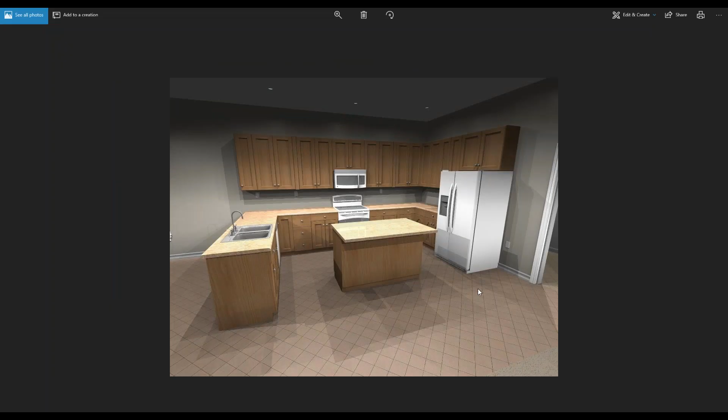I'm just going to pop this up real quick. This is what we started with. You should be able to see this image — very basic, 80s or 90s style kitchen. Nothing too fancy, oak cabinets and plastic laminate tops. And the flooring might be a little bit horrendous.

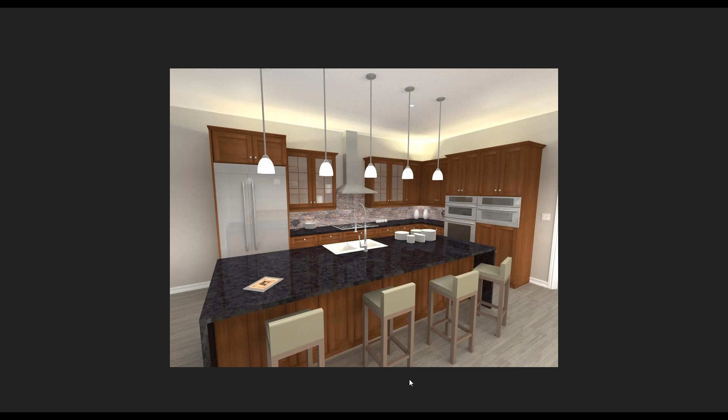So at some point, you want to just update your image. You want to get a little bit cleaner look, something a little more modern. I'm just going to pull up one that we're going to attempt to achieve here. There's a good one there. So this is just an image that I ran last weekend, something a little more contemporary.

We're going to start with the bare shell. We're going to start by adding in our lower cabinets in this area over here. We're going to add some tall cabinets. I'm going to show you how to modify the face layouts to accommodate some built-ins. We're probably not going to put this in, because this unit actually has a microwave. When I did this, I didn't realize that — I thought it was a two-oven setup, but it actually has a microwave. So we're going to leave that second one out, just do that as a pantry. We're also going to do a built-in refrigerator over here with a rather tall cabinet above it.

Take a look at how you can do backsplashes, whether it's a wall finish that we put in, or whether it's a solid, or we can do it as a tiled backsplash across the back here. All right, we have a hood, we have some pendant lights dropped in, and we have a waterfall countertop on our island here, which is a nice large island, great for entertaining.

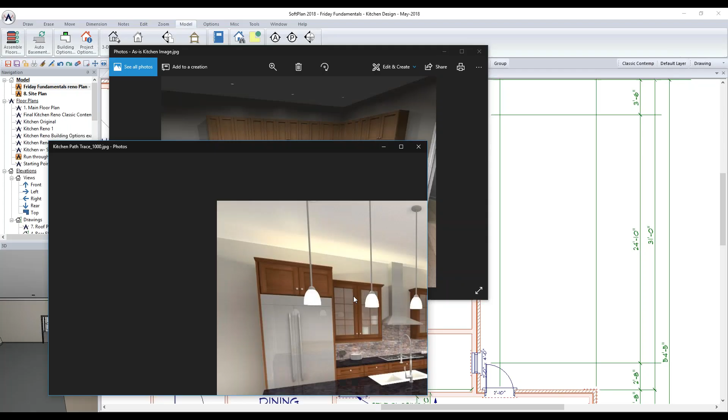Okay, so as you can see, a big improvement over what we had here. We're going to try and achieve this look when we're all done.

Okay, the image quality may not be quite there with what we have time to generate in class today. What we have here is what we call a path trace. It's a ray traced image using the path trace lighting, which means it took about 1,000 passes on this particular image, so it ran Friday into Saturday of last week. I'm not sure when it finished up. It's not a very large image, so it probably didn't take that long, but you can see the quality you get out of that with the reflections and so on.

I might touch on that a little bit later as we get into some of the different modes. But that just gives you an idea of how soft the lights can look, and how clean the image can look with reflections and textures appearing correctly.

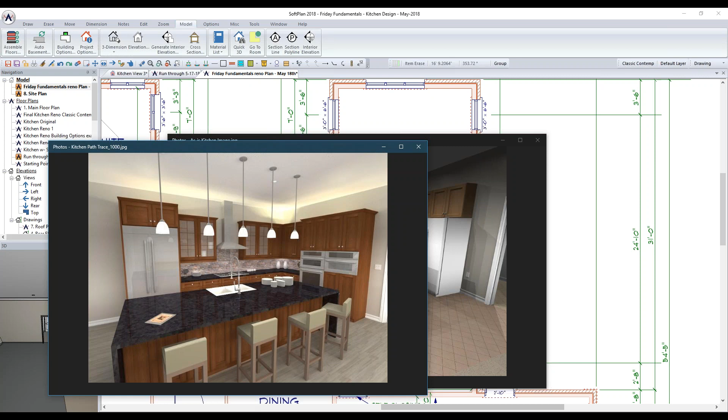We're also going to take a look at some of the different options you can do just from that layout. Very similar layout again, and we can change the finish on those cabinets, make them gray. We can change the countertops to white, and you can see the transformation you achieve just by making changes like that, plus a little difference in the furniture and so on.

And you can also do your white cabinets there. Again, this is a fairly low quality image that I just generated very recently, just to give you an idea. Same cabinets, we didn't have to redraw them, but we can easily go in and modify the finishes so you can give the client choices.

And that's what it's all about nowadays, is they want choices. They want to know that you've explored all the different options for them and not just given them one scenario to pick from. So we have all these abilities built into the program.

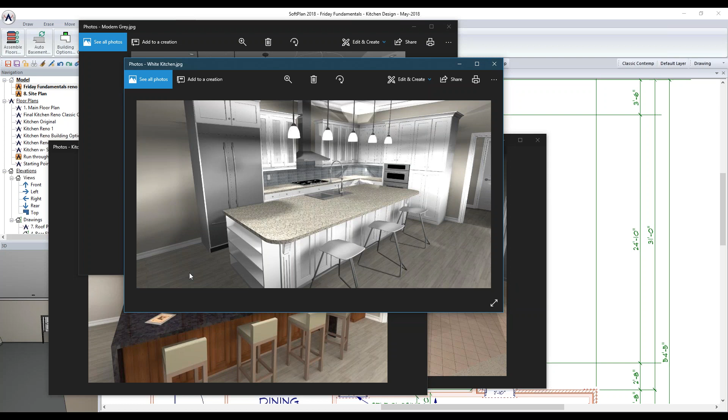You can obviously use the building options as well to set up different appearances. So I could literally draw this layout we're going to draw now, put it on a specific building option, turn that building option off, and then redraw the kitchen again on a new building option.

So when the client comes in, I can say you can have this one or this one. I could do three or four different layouts and just flip them on and off as you choose. So that's the power of building options.

Building options are found under Model and Building Options. I have a few of them assigned here already. The default is where you typically draw, and if you look, you can see you have a number of items up there already at 970. By default, we've put furniture on its own building option, so it can be toggled on and off.

It can also be done with layers for something like furniture that's not counted in your material takeoff. It's more for a 3D aesthetics look. You can put demo items on the building option, so if you had to remove walls, that kind of thing, you don't have to erase them, but you can put them on another layer or building option and turn them off.

We're going to be working in the classic contemporary building option that I set up here. When you go into Model Building Options, you can easily come in and change these just by rewriting over top of them. That's already been done for us here, so I'm going to use this one.

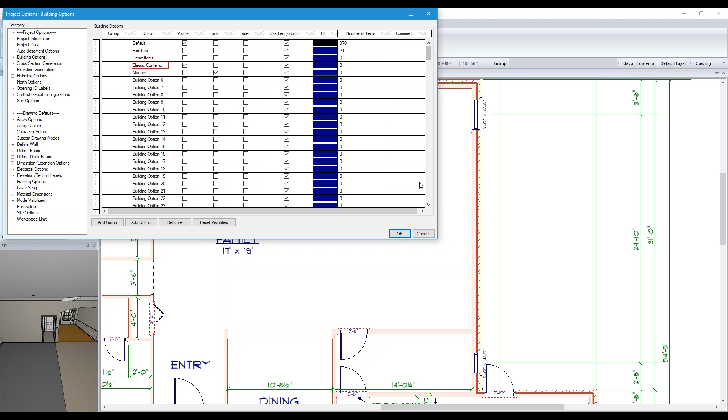Now, if you're accessing the current building option - sorry, I just need to move my GoToMeeting dialog, so if you wonder what I'm doing, that's all I was doing. You can see your current building option listed here.

You can also access them and make them current. You can turn them on for visibility. You can lock them as well. So if there's something you want to do, you set up a building option and you don't want it to be able to be modified in any way, you can set it to lock, meaning it cannot be modified.

You can even fade it to the background so it doesn't show up as full on the screen as an unfaded building option. Something we typically do with our furniture is we fade it on a layer so that when you're looking at the drawing, you see the drawing, but you can also see the furniture kind of popping in there.

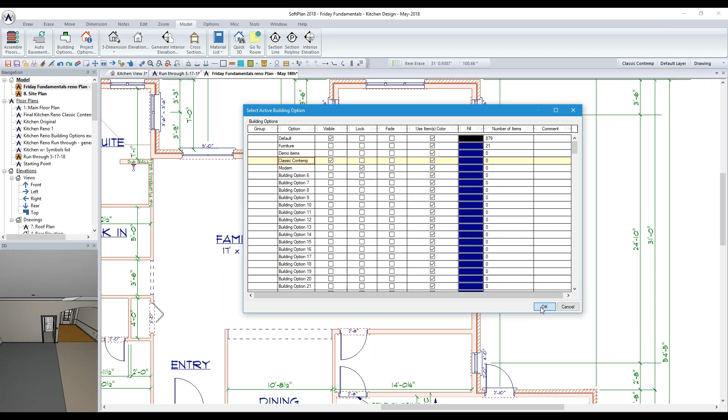To get started, we're going to have Classic Contemporary selected, and I'm just going to pick OK on that. We're going to start by drawing some cabinets in. Given that we have a corner scenario here, we're going to start drawing in the corner. If you're just doing a galley kitchen, you're going from one end to the other - it's not going to wrap in the corner. You can just start with your basic standard cabinets.

So when we go to the Draw menu at the top, on the ribbon bar, you see Cabinet. And cabinet pulls down, you have manufacturer options there. We've put in a number of manufacturers for you to choose from. We are constantly looking for new ones and adding new options to this list.

Right now, as it is, we have Aristocraft, Armstrong, Decora, Dura Supreme which is a fairly new one, Echelon, Kitchen Craft, Made, Medallion, Merillat which is one of the first ones put in there, Mid-Continent, Schrock, and Wellborn.

So we will add more as more become available to us. They are fairly large libraries, the majority of these. A lot of them won't be of any use to you unless you actually know the codes for them, in which case you probably have a catalog or access to that information. You can tell a lot by the names generally, by width and depth and shape when looking at the previews, but it would benefit you to know what you're looking for.

So when we're drawing in here, just to give you an idea, if there was an oven or pantry type cabinet that I wanted, Armstrong is one of the ones that has their libraries named quite clearly, and it's not hard to figure out their codes. So if you wanted to put in an oven cabinet, you can slide down in here. You can see the 3D, and you can even spin around in it. So you can see you have drawers, an open area with rails, top and bottom, that could likely be sized

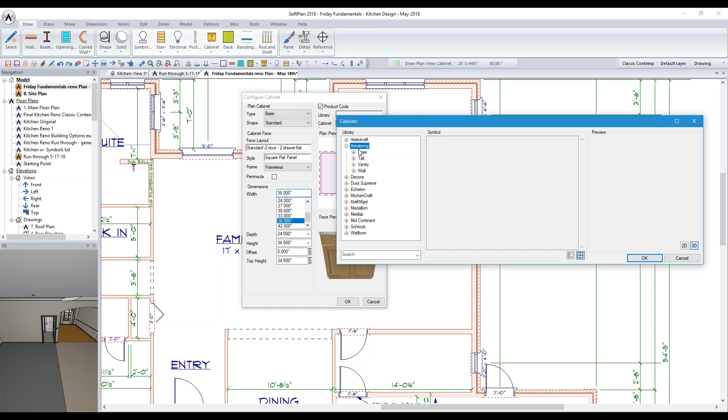You can still dig down and search on specific items, but this gives you that tool. There's a product code box up at the top. Remember when we went to draw a cabinet, you could see the manufacturers there - that's one way to access them. You can also access them from here by checking the product code, then going into Armstrong, then into Tall, and picking the one you want from there. So the option is there as well.

Once you've gone in to draw a cabinet, you're not locked down - you can still get to everything. We're going to go to plan cabinet and pick a base type. Generally, I start on the floor, and then I work up.

We're going to pick a shape from here. We can start with standards. You have diagonal corners and corners. When you get into the corners, you'll have the option to make it an unequal leg, like a blind corner cabinet. You have half round ends, 45 and 30-degree angles, fillers, end corners at 45 and 30, back panels, end panels, quarter rounds, angled front, angled end, and a chamfered corner. So these are different cabinet shapes, and if you click on them, you'll see what they look like in plan.

Don't get distressed over the face preview. It likely is picking up two drawers in this case, because that's the standard being used on the side, so it got applied to that edge as well. Not that you're stuck with that - it's just what the preview is popping up for us.

So you can come in here, and we're going to start with a corner cabinet. We're going to pick next our face layout. I don't want a two drawer flat - I want to pick a single door because it's just a corner cabinet, and there's two small doors there, and I don't want a drawer because that just wouldn't work.

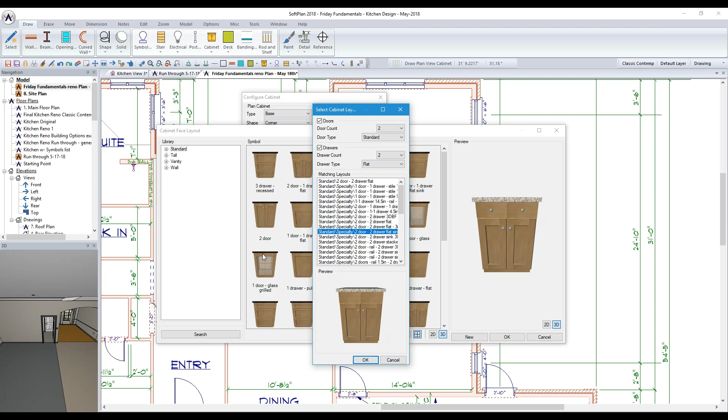The problem was each of these are just names that you'd have to sort through - you'd see them, but you had to click on each to see the differences. What we've done is put that all on a dialog so you can see what you have there, and you can still go into the search mechanism and dig down deeper to find what you need. So that search box in here is still there - it's just one layer deeper now. Hopefully you find what you want right here.

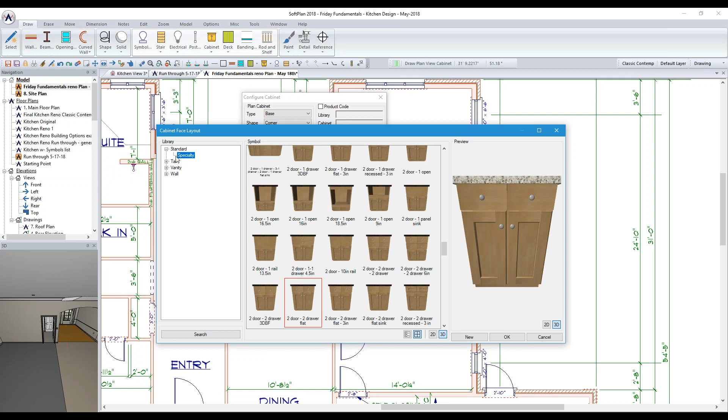And if you don't, you can populate these libraries as you like. Right now I'm sitting in standard. We've put in specialty some of the more detailed, more complex designs that we find mostly with manufacturers - not something you would likely build yourself, but something you'd dig down and find in a manufacturer's catalog. That's what specialty is, and it can be found under any of the different shapes - you have standard, tall, vanity, and wall, and they all have specialty built in underneath them. That's a fairly long list, especially under base, as you can see. But that's not to say you can't come in here and find them.

So if I want a 3-door, I can pick those up. If I want a 3-door left or right, I can pick up the ones I want from there. All right, so we are going to go back to standard, and given that this was a corner cabinet - getting way off topic here - I just want a single door, a 1-door cabinet, as we would call it.

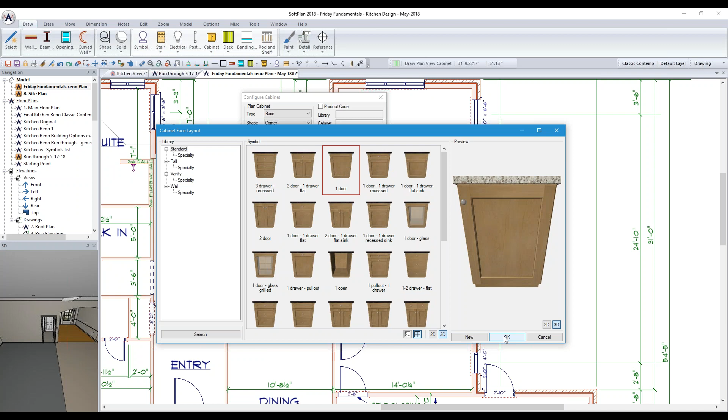Okay, so this is the cabinet face, and I'm going to pick OK. That means that's going to be applied to both of these. We will put a handle on one of the two doors because it's likely a hinged door that opens up as one.

Okay, so the width is 36 inches, 36 inches this way, 24 inches deep. The height is 34.5, meaning we're going to add a 1.5 inch countertop on top to take us up to an even 36 inches. Offset is 0 because it's sitting on the floor. Your cabinets will be relative to the floor system, so you don't need to worry about how thick the floor system is.

This is where you can play with the unequal legs if you want to make it a blind corner, so you go with 24 and 36, that sort of thing. I'm going to leave that unchecked and just go with it the way it is.

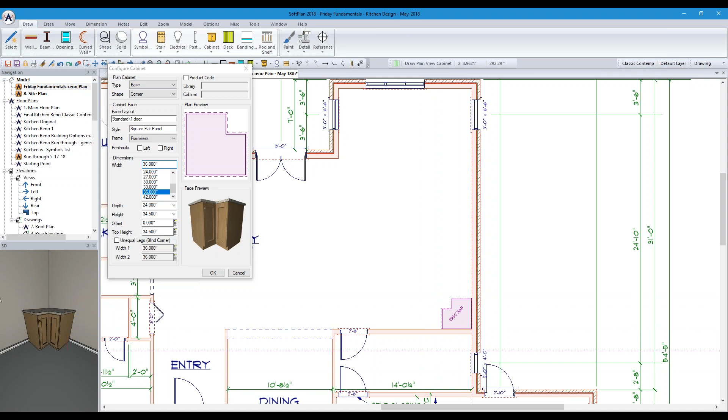We can leave this dialog open. I'm just going to pull it off to the side, click anywhere in that corner. Given that it's a corner cabinet, it knows where its two backs are, and it will try to fit into the corner and find the drywall as well. So you'll see a gap there - that is to allow for the drywall.

Moving along from there, I'm just going to grab my layout here, and we're going to add in a 42-inch cabinet beside it. We can come back in here and go to base - I'm going to change this over to a standard cabinet, just a straight cabinet. I certainly don't want a 1-door cabinet in here, but I could find a 3-door cabinet that would fit nicely in this spot. So I could go into search, and this is a good time for us to change this to say 3+ and maybe 3 drawers as well.

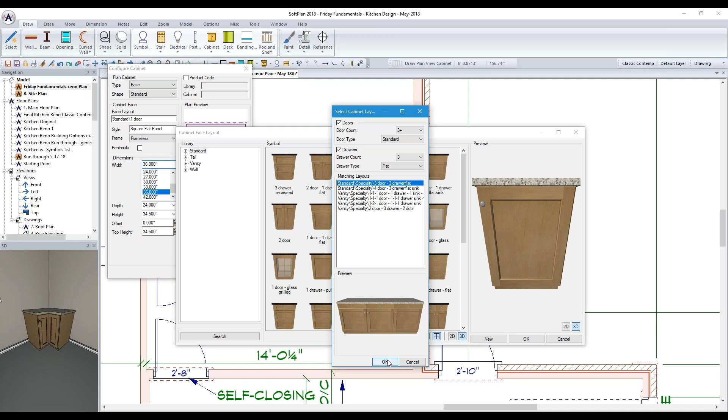Okay, so there we go - it came up as the first one in the list, but when I put in that criteria, it came up with a 3 flat drawer face. When you see drawer flat, that means the face of the drawer is just one plane, as opposed to recessed, which looks like this door - it has stiles and rails, and then a flat panel behind it. So I'm going to go with the flat drawers and the square flat panel doors on this one. I'm going to pick OK.

So there it is, and we're just going to drag this off - oh sorry, I touched the edge of my screen. I'm actually just going to pick, and go back and select it again. 3 and 3, flat drawer type, standard door type, pick OK. There we go, and I'm just going to pick OK.

Now when adding cabinets next to another cabinet, as long as you're about half the width of the cabinet along, close enough that the edge is within about 6 inches of the last cabinet, we will snap them together nice and neat for you. You don't need to work too hard to get that to work.

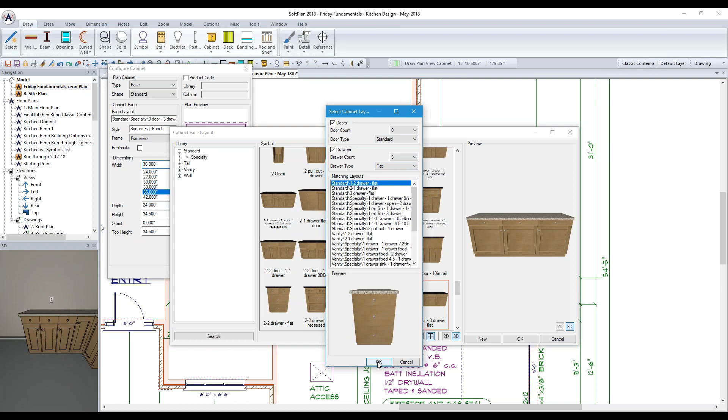All right, now I'm going to come back over here and change this over to a 3-drawer cabinet, so I'm going to go to my search in this case. I'm going to take the doors down to nothing and put in 3 drawers, so I'm going to do a standard 1-2 drawer flat, meaning it's a 1 and then 2 drawers the same size, and I'm going to pick OK on that. And I'm going to pick OK again.

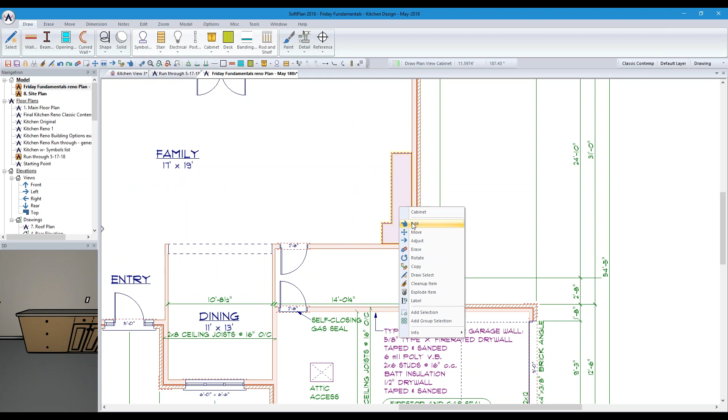I believe when I drew the last one, I put it in the wrong width. I want to go back and change that, so I'm going to draw this one in at 36 and drop it in. I'm going to edit this cabinet - now if you're having trouble picking them, if you know roughly the area, once you edit it, it will highlight. Otherwise you can explode the cabinet run - be sure it will only explode once, not twice.

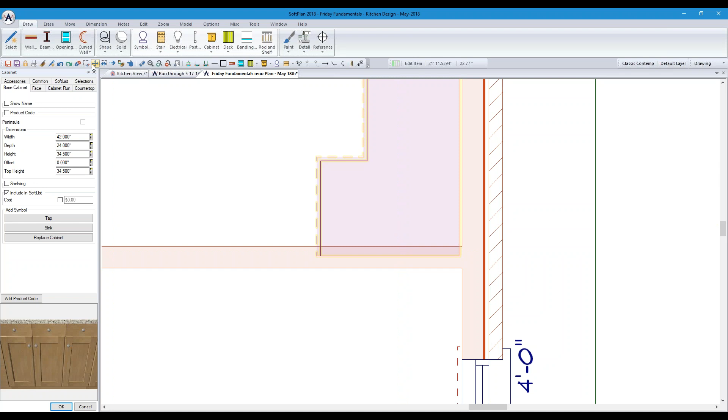All right, I'm going to make that 42 inches and it pushes it out, and it's going to expand it in both directions, in which case it's easily fixed - you just move it along to here.

And then 1, 2, 3, 4, half an inch, hit the home button, and I'm exactly a half inch away again. So now what we're going to do is go back to draw, and I'm going to pick on select. I'm going to pick on that first cabinet again, which is 42 inches now, and drop it in there. We can check to make sure we're correct: width of 42, depth of 24, 34 and a half high. Okay, so we're good, and I'm going to pick OK on that.

Let's just take a quick look at what we have, just so we can see how we're doing. What I'm going to do is pull up an interior elevation of this face. So when you're drawing an interior elevation marker, you simply click once to place the marker and then once to position the direction you want it to face.

Now, when we're looking at this interior elevation, it's going to go all the way across the room. So if you don't want to see the entire room, and want to zoom in a little bit better, just adjust the red dash line shorter so that it encompasses what you want to see. We're going to go a little bit beyond this with a refrigerator cabinet at the end here, probably an open cabinet with a built-in refrigerator built into it. So we're going to use that.

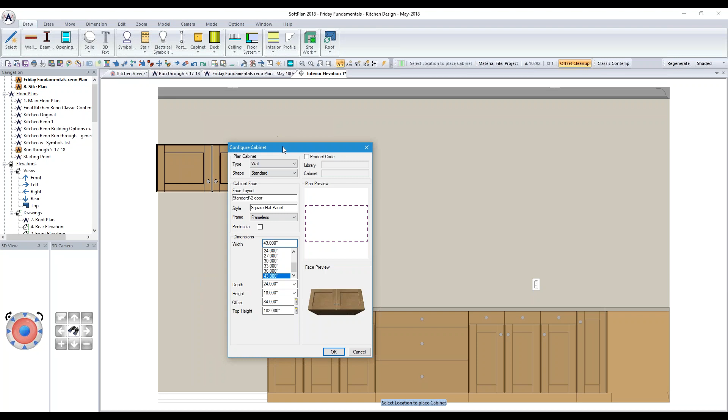Okay, so I'm going to pick, I'm just going to move this off to the side, and you can see it's already lining up, and I'm going to drop that right in there.

And if we come back into our floor plan, you can see that it's been drawn in there for us already. So if I edit this cabinet here, jumping a little bit ahead, you can see that we have a countertop line drawn out to the side there, and that's going to interfere into this cabinet space.

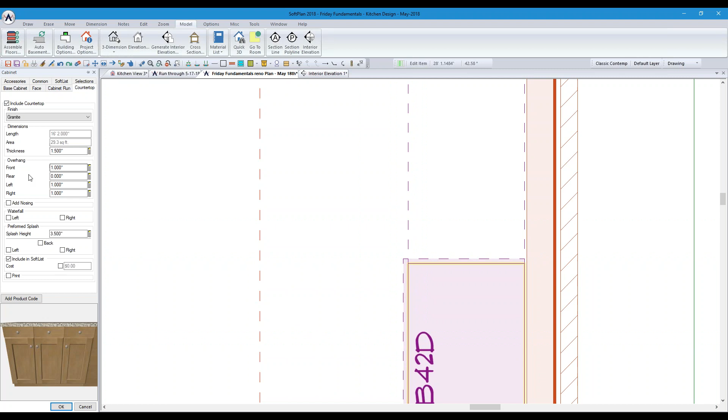So you can come into your countertop option. Now, as this cabinet is laid out, the front is obviously out here. This would be the left, and I could change the left to 0 inches, which will knock the countertop off at that point.

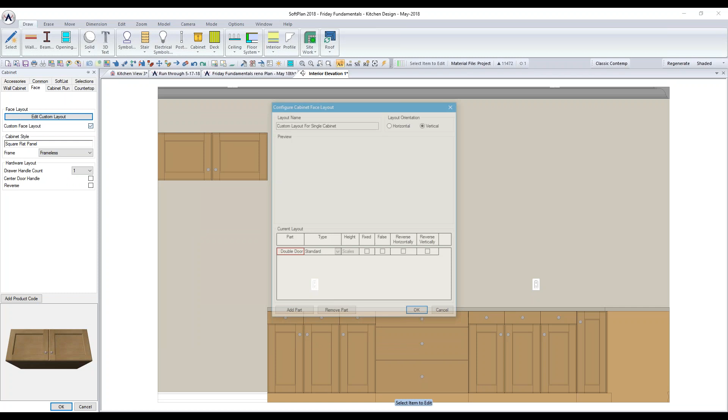All right, I'm going to take us back into the interior elevation again, and we're going to edit this. I'm going to pull up the edit and go to the wall cabinet options here. Actually, going to go to the face. And we can then come in.

I'm going to go into custom face layout just so you can see what we're doing here. There's a checkbox there that allows you to edit the custom layout. So this is only going to happen in this one spot. But if I wanted to turn this into a cabinet that has sides on it, like an open cabinet, I can actually add a part to this.

And don't worry about where it goes. It might go in the wrong spot initially, but you can then change it as you need to. So I can say I'm going to put an open cabinet underneath it, and pick OK.

The other way to do this would be for us to actually add false gables on each side, like a filler on each side. It's another way of doing it. The way I'm showing you here, we'll put a back in the cabinet, which may not be what you want. It will suffice for what we're trying to achieve here, but it does allow us to put a crown mold on top of it as one cabinet, whereas the fillers don't really take the crown mold the same way.

So what you can do then, once you get them in place, is reorder them. The little dots on the left-hand side here, you just pick up on those with your left mouse button, and you can drag to reorder any of the cabinets that you have here. This isn't the only time we're going to look at this. We will come back in and take a look in a few minutes.

All right. Now the open cabinet, I'm going to change its height to 80.5 inches and pick OK.

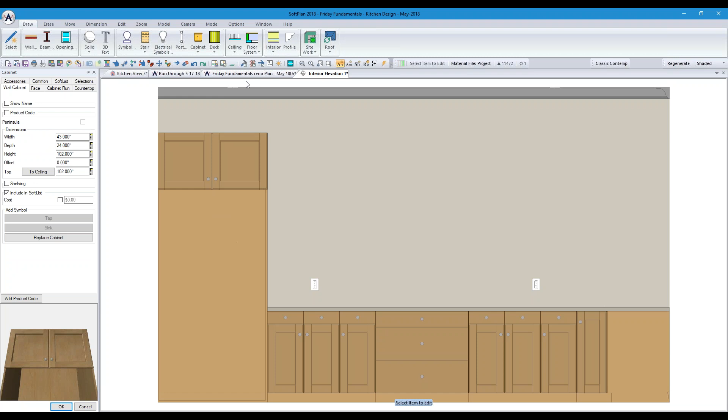And I'm going to make the... if we come back into our 3D, which is over here, I already had the tab open, so you can see it here. You can see that we have our cabinet already set up for us to place our refrigerator right in. It has the end cabinets on it.

We may still need to modify a little bit, but I'm going to move along now and draw the cabinets on this other wall, and then we're going to come back and fill this area in. Then we'll come back in a little bit later and start filling in with different appliances at the end.

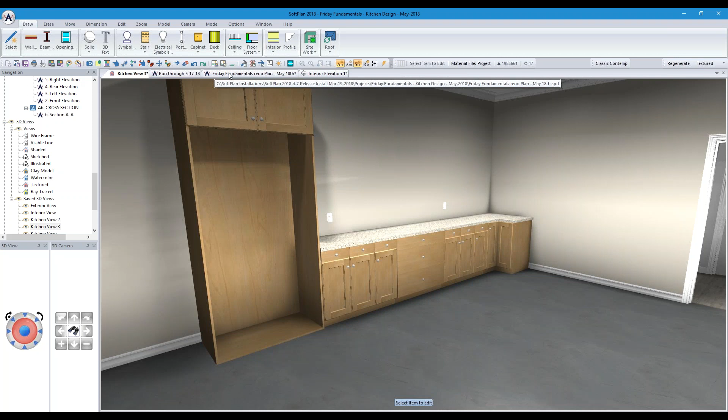All right, so what we're going to do is come back into our drawing state again, and I'm going to add in one drawer base here just to get us a little bit out of the corner so that we're not crowding the corner too much. We want to have access to that area.

So we're going to go to draw. I'm going to go back into cabinet. I'm going to go back to base, and this time it's going to be a standard base, and it's going to be a 3 drawer.

So I'm going to do... I'll do this one. That'll be fine. Pick OK.

And I'm going to make it 18 inches wide. So we've got some preset widths already set up in here for you. I didn't save my... preset widths are all set at 3-inch increments, just like your cabinets would be. So it allows you quick access to those.

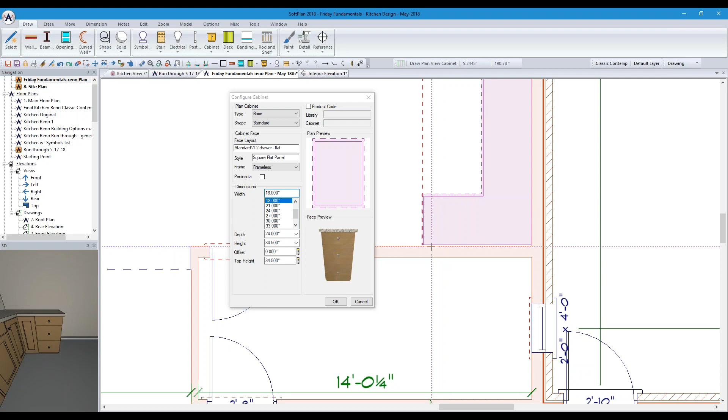Okay, so that's going to draw in there. And then we're going to start moving through with an oven cabinet, and beside that, we're going to drop in a pantry. So the next thing I'm going to do is change this over to a tall cabinet. I'm going to change the height on these to 96 inches.

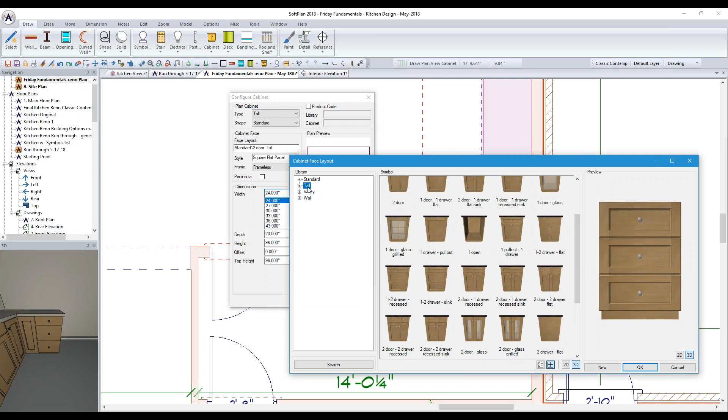There we go, and we're going to choose - I'm going to pick one, and then we're going to go in and modify the face with you so you can actually see how you can pick different designs or setups for these. So we're going to do a 2-door, meaning 2 doors top, 2 doors bottom. I'm going to pick that one and pick OK.

And we're going to make this one 30-inch wide, so I'm just going to slide down to 30.

And we're going to basically come into this cabinet. We're going to take out the doors on the second one and modify the face to allow us to place our ovens into this region.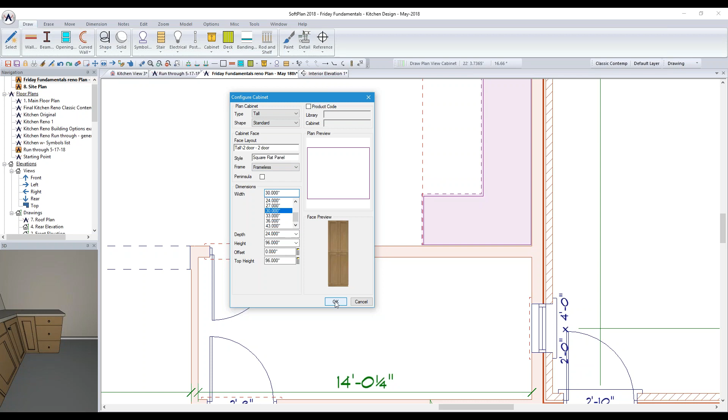All right, so we're going to start with a 30-inch wide, I'm going to make the depth 24 inches, the full depth of the cabinets beside it, and it's 96 inches high. We should be good - always go back and check your information, make sure you got what you want there. You can change it later, but if you can get it right the first time, all the better.

So I'm going to drop one in there, then I'm going to drop one right beside it.

And while we're here, I'm going to go into my model. I'm going to go to interior elevation, and here I'm going to drop in a marker right there, and I'm going to adjust it shorter as well. And then we can take a look at that elevation quickly and easily.

It's right there. And save your changes as you go into that view. And there it is, all right.

So here's the cabinets on the other wall. We're cut through them right now. There's the bank of 3 drawers. Here's our 2 pantry cabinets, basically.

And what we're going to do now is come in and modify this one to have a different face on it. So what we're going to do is edit it, and I'm going to come in and go to the face tab. I'm going to go to the custom face layout. I'm going to click on the bottom one, and I'm going to remove it.

So we're left with just doors, one set of doors. Nice part is these doors already have their handles at the bottom. If you happen to get doors with the handles at the top, and you know you're 5 foot nothing tall, and you've got 8 foot tall cabinets, that's going to make it really tough to open those cabinets up. So that's what the vertical or reverse vertically does for you - it just reverses the handles from top to bottom.

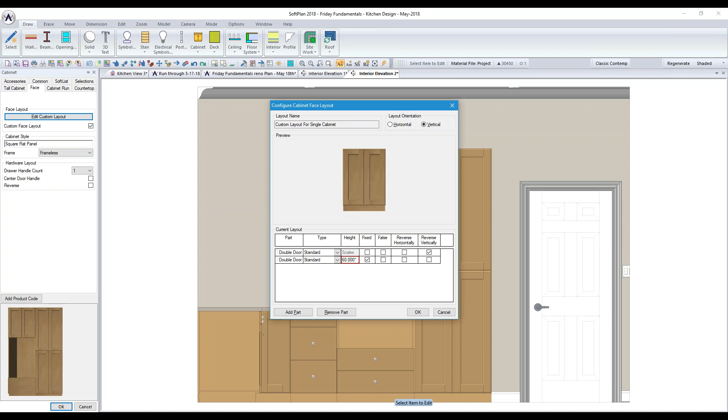We can actually edit this one if we wanted to as well, and modify the sizes of the doors, that kind of thing. So you can come in here and modify the bottom doors to be fixed at, say, 60 inches, something like that, and see if that matches up. Hey, my math was good. All right.

We are now going to try to add in our oven at this point, if we wanted to, to see if it fits correctly.

I'm not one to typically draw in this mode, but I'm just going to find the name of the one that I wanted to add in here for you. I believe it is - yeah, it was the Jenn-Air wall oven. It's a 30-inch combination microwave wall oven, and it's in the Gen Air, SoftPlan Plus Jenn-Air folder.

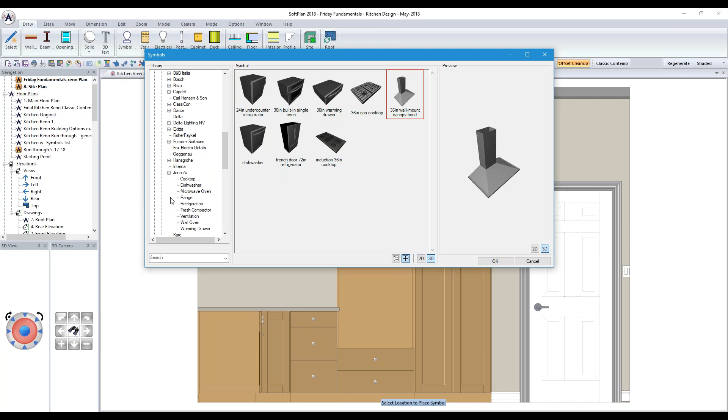So we are going to go to the Jenn-Air, and I'm going to go to wall ovens, and it's going to be this one - this will work. Actually, this is the one we had. And pick OK, and I'm going to drop it right there.

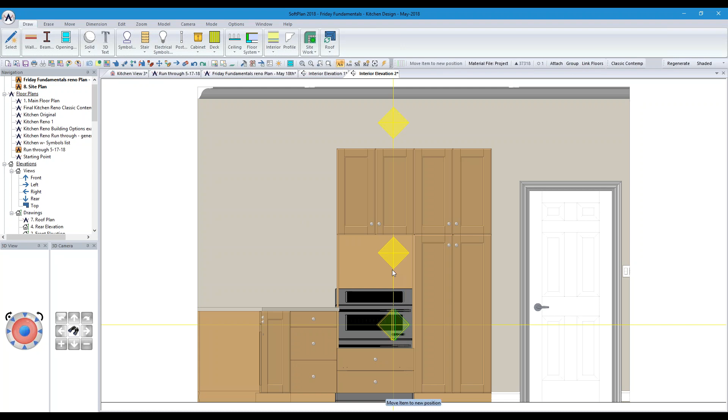And I totally expect this to sit on the floor - that's where it's told to sit. It doesn't know that I put a hole in the cabinets for it. It's going to find that out in a minute as I move it up and into place to where I want it.

Okay, and it is roughly 1 foot 8 up that it's supposed to sit, so we're pretty close just by doing it there. You can then edit this and modify it to be an exact dimension up from the floor if you choose to at that point. Okay, same thing with this countertop - we can chop that out if we needed to. I'm not going to worry about it right now.

Coming back in here, we're at about 20 minutes left, and I want to get some wall cabinets drawn in, finish our cabinets off, and show you how you can pick some different finishes and throw some lights in here. So I'm going to move along and add in some wall cabinets into the corner. We're going to go back to Draw Cabinet, Wall, and go to Corner again.

Just a standard, and we're going to go with 18 inches. That's what we had beside this. Drag that off the side, and we can drop one in there. And then we're going to drop in a 42-inch wide.

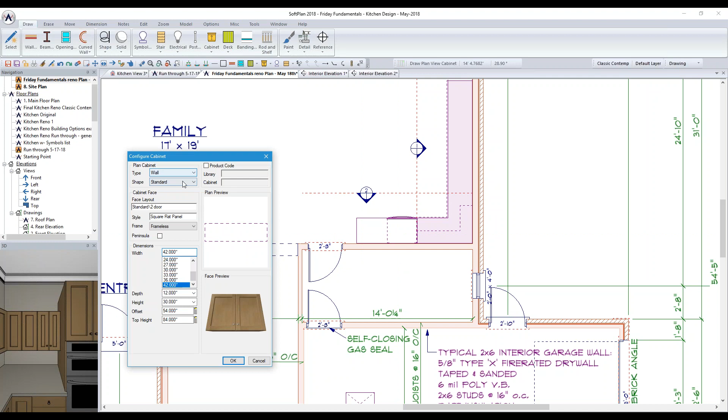I'm going to type that in because it's not one of the sizes we have available already. You can see that it adds in the ones you've typed in as one of the last choices, but then all the other ones are preset for you. And we can just change this one over to be a specialty.

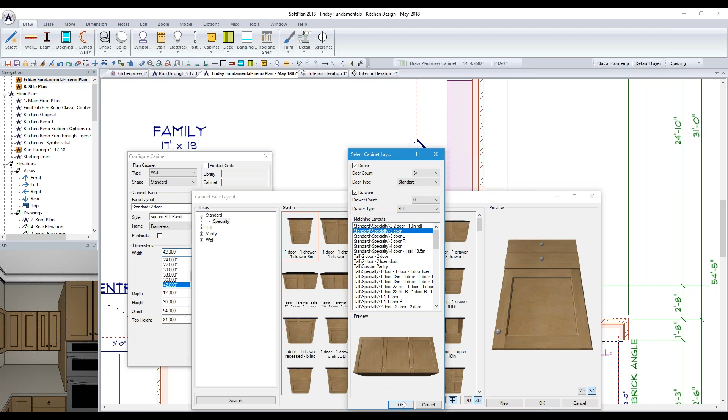Actually, let's do a search, and let's do 3 doors. That's good, and I'm going to pick OK.

And we're just going to drop that one in right there. Then I'm going to move up and drop one over here as well to give us room for our range to go in the middle there. With that done, I'm going to pop us back into the 3D real quick, and you can see what we've achieved here.

We can easily come back in and modify these to be taller cabinets if we wish. So I could come back in and change their heights and so on right in here. I can change that to 42 inches. I can set the top to 96 to match up with the other wall cabinets that are around the corner there.

When I've done that, I can then pick repeat edit and make that same change to the others so that they pop up to match. I can also come into these now and edit this one, for instance, and go to the face of the cabinet.

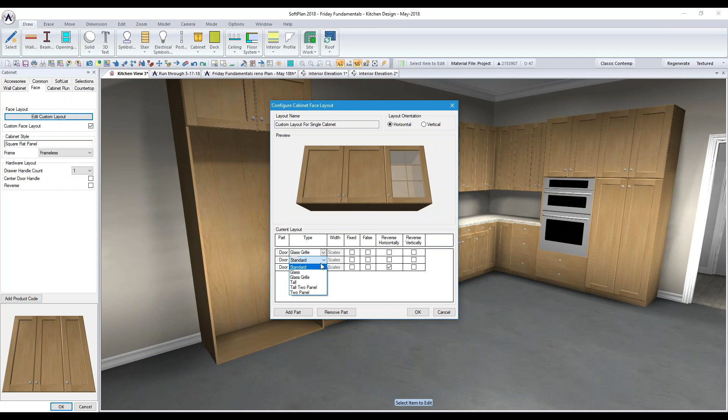This is where you can come in and modify the doors. If you've drawn the one, not the one that you want, you can put in glass grille. So, and pick OK. I should be able to repeat that change — if not, it's easily done to edit those back in. But it did, the repeat edit just picked up just fine and did that for us.

So with that done, we're going to draw in our island next. I'm going to go to the floor plan again, and we're going to draw in a couple cabinets here using the individual cabinet method again. We're going to go to base, base, standard, and in this case I'm going to just pick a standard old 2-door one.

That's a flat sink. Anytime you see sink, it's a non-operating drawer — it's a sink base, so it's just a false front. So I want a flat. That's the one I want.

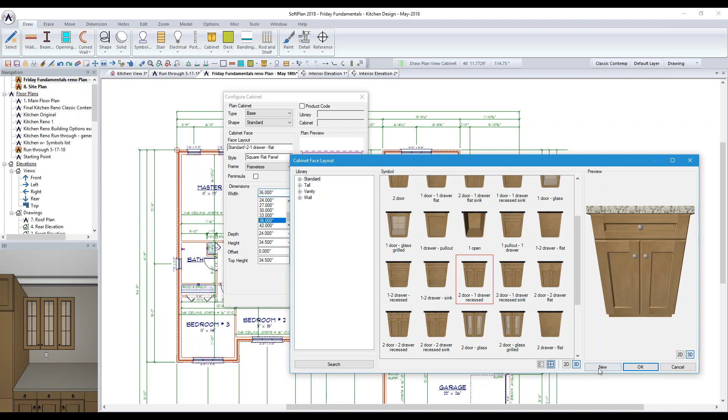No, we'll just go with that — we'll just go with this one. And just need to move that out so I can get to my OK button. There we go, and we're going to pick OK.

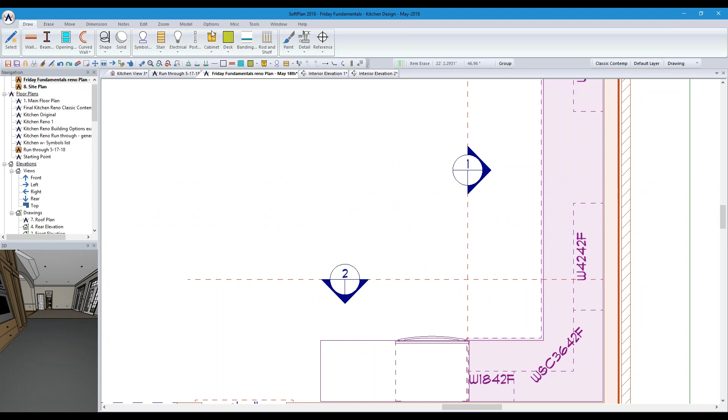And I'm going to draw a couple of these in. So I'm going to start in here. Oh, yeah, back that out real quick. I didn't change my width on that base cabinet, and I want to get that to a 24-inch cabinet.

So I'm going to drop in 1, 2. I'm not worried about the fact that they're a little close to the other cabinets at this point — I'm going to come back in and fix that in just a moment. And we're going to go back to cabinet again.

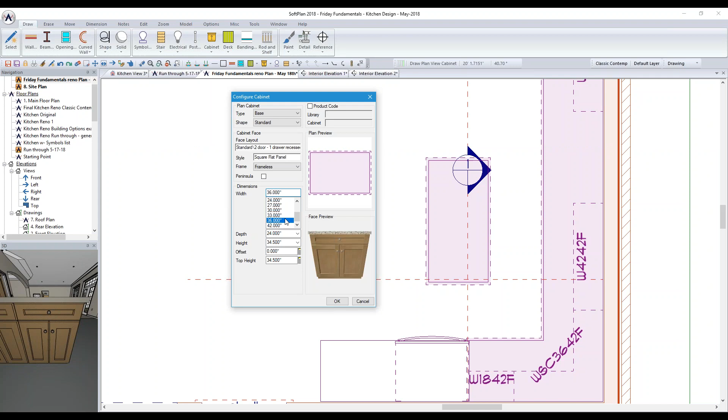This time, just change that up to a 36-inch. And then a 24, and a 24. Then we're going to go back and change our depth to, say, 18 inches, and I'm going to change my face to a full 2 doors.

No drawers on it. Click OK. And we're just going to drop these in like so, and change this one to 36, and it should fit perfectly in the middle. Pop. There we go.

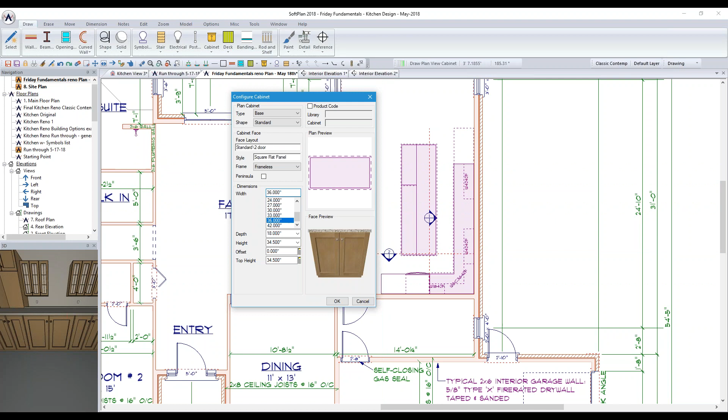So now we have our island. I made those ones a little shallower because I'm going to have a breakfast bar over this side here, so it's going to overhang a bit. So it's just going to be full doors, no drawers, so that you can access them underneath the breakfast bar area there.

So once you get this placed, you can add your dimensions in, and you can just double click on that. I can make that 3 foot 6 inches, move that over to the side. Same thing here. And move that up. And in it goes.

Oh, these ones hadn't cleaned up yet, so I'm just going to back that out. And I'm just going to do a quick cleanup, make sure those are bound. There we go. And we're going to try that dimension again. And now they're moving as one, which is much better.

All right, so once you've done all that, you can edit your cabinet. You can go into the countertop options in here, and you have all the different overhangs. So in this case, this is the front of this, and we want to change the front to say 16 inches, pop it out over the front edge there for us.

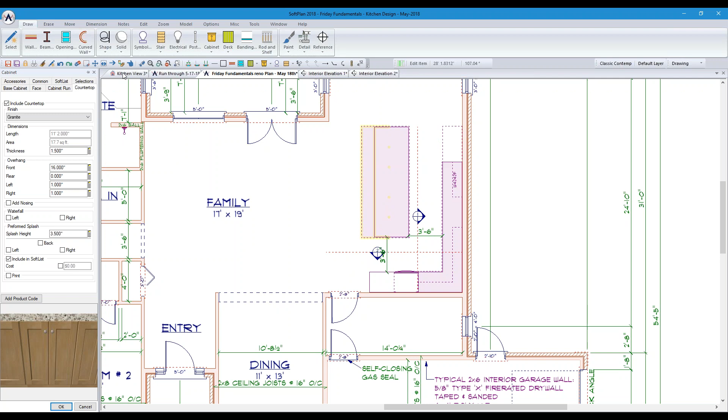So with the countertop drawn, you can easily come in now, and you can also edit the countertop. There's different options available to you in here. So on the countertop, you can put in waterfall left and right, which will bring the countertop down to the floor on either side. And we can start adding some of our other items into here.

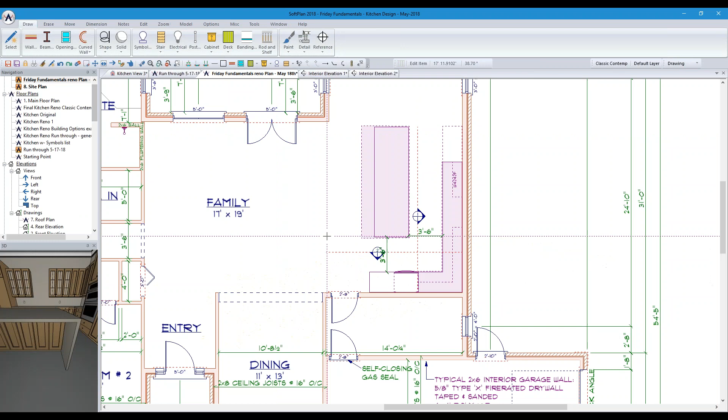So I'm just going to drop back into the plan really quick and go to symbol. The refrigerator we're going to put in here is also a Thermador. So I'm going to pop us back into the refrigeration in here and just pick the 42-inch. This one here, I believe.

Drag that down. Remembering you can leave this open while you're working in it. And the other thing to remember is if you turn on F11, it's the same as hitting the snap option up here, the fourth icon on your toolbar. It allows you to find the center of items and drop them in. So sometimes this makes life a little bit easier, and you can see on our preview down here that it has drawn a refrigerator in for us.

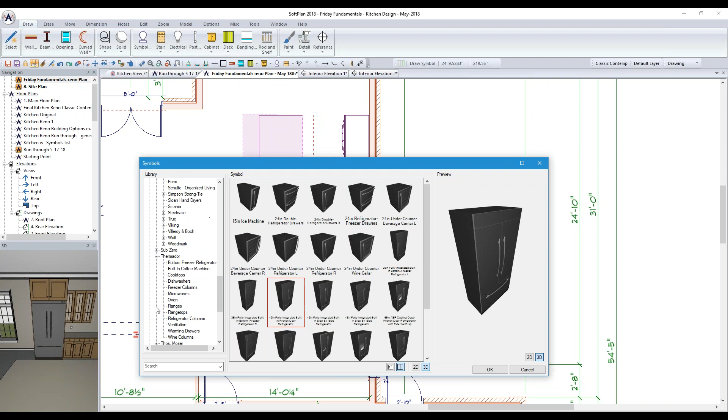And we're going to then go and find our stove, which is a Thermador. So I'm going to find that, not in SoftPlan Plus. This one is available outside of the Plus libraries, so it'll be down below in the Thermador. There it is. And in the cooktops. And I've just got the X36 365S, I believe, drawn there.

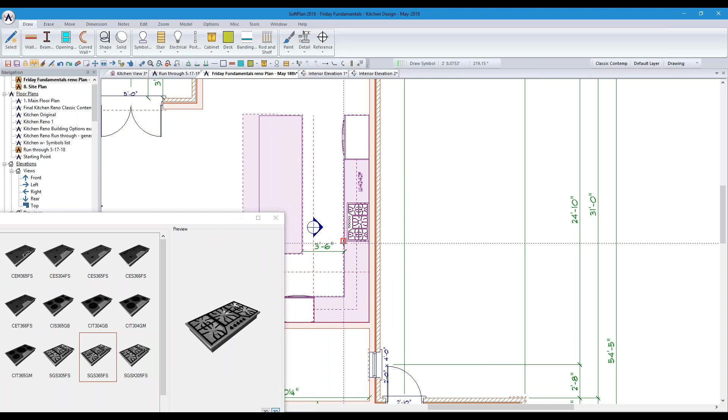I'm just going to move this off to the side just for a moment, and I'm going to snap here to draw that. This will automatically sit on the countertop. I'm going to show you a different way of drawing a sink. You can draw them right on the countertop, obviously, but there's also the option that if I edit right there...

I'm going to edit this cabinet. You'll see that I picked the right one, so it's a 36D. I can change the face of this to be a proper sink base as well. That would be part of the face, so I could come back in here and I can call this a 2-door 1-drawer flat sink for one thing.

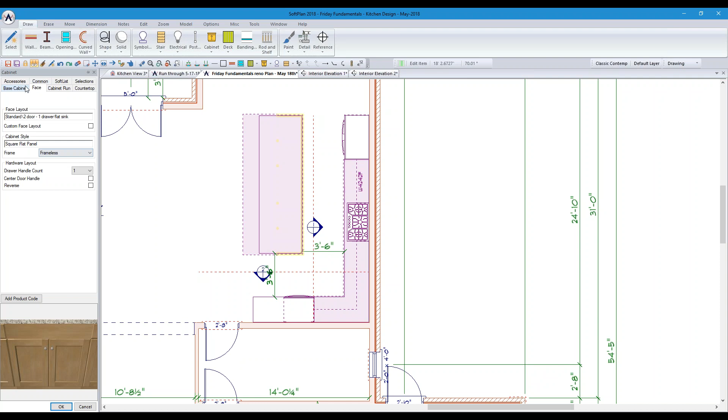But I can also come back to the base cabinet and I can add a sink, first of all. And the sink I want to add in here is going to be a Kohler K6534. So I know the number, so why don't I just type it in, and it comes right up, and I want the -3, so it pops that right in for me. All right, and I pick OK.

While editing that again, I can come back in. I want to edit the sink, or the cabinet, sorry. So I'm going to right-click in that area. I got the wrong one, so I'm going to click here. I'm going to pick cabinet and edit. I got the right one now.

And I'm going to add my tap in, and the tap that we're going to add in is out of the Hansgrohe libraries. So I'm going to type in Axor, which will limit my search somewhat. And it's a Citterio.

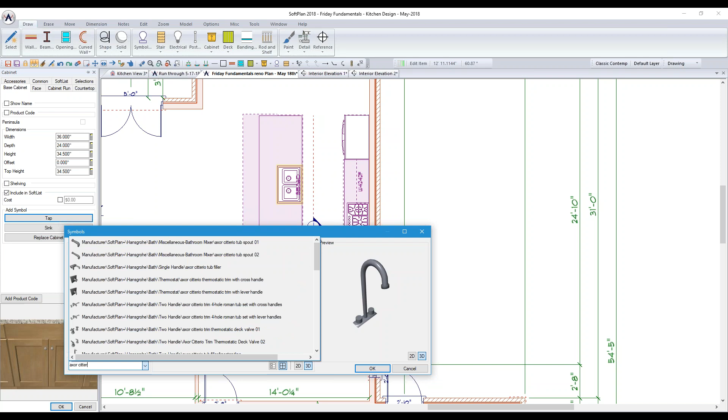And that gets us a pretty good view of what we want. I know that it's this one here, a semi-pro faucet, and I pick OK. That will drop that in for me. Then you can move it around, do whatever you need to from that point forward.

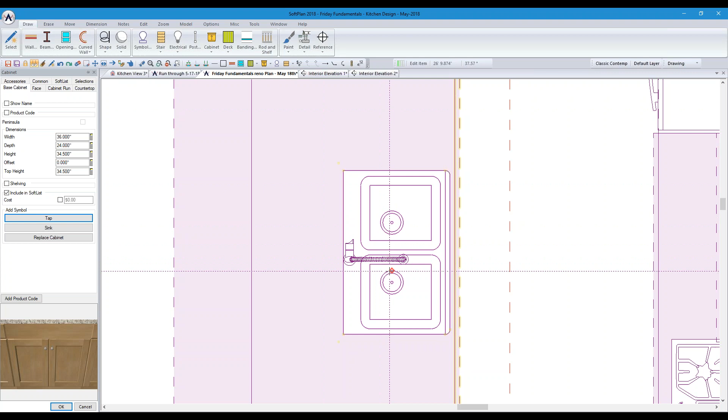The other thing to take note of is the kitchen sink I put in here is a farmer sink, or an apron sink. So I do need to move it forward a little bit just to get it out in front of the cabinet. Sorry, I meant to move it, I picked adjust by accident. So I'm just going to move it out proud of the front of the cabinet there to cut through the countertop and leave that hole.

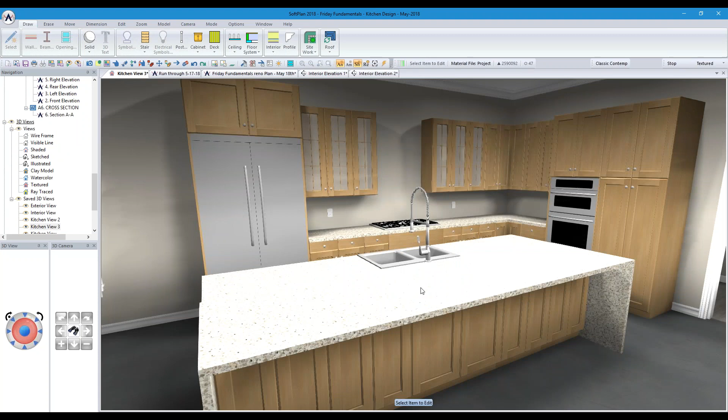So now when I go back into my kitchen view, you can see what we have drawn there. And that's the view that we want to see right there.

All right, so with that done, I'm going to take a quick look at drawing in.

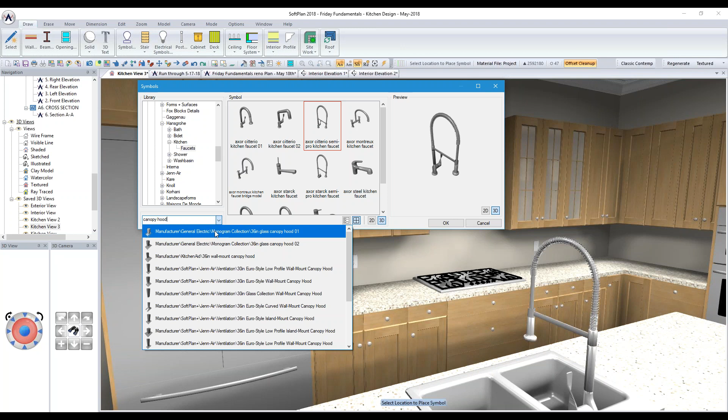Canopy. There we go. And we are going to go with the Thermador, or no - it's in the KitchenAid library, sorry, looking at the wrong thing here. There it is. I'm going to pick OK, and I'm going to drop it in right there.

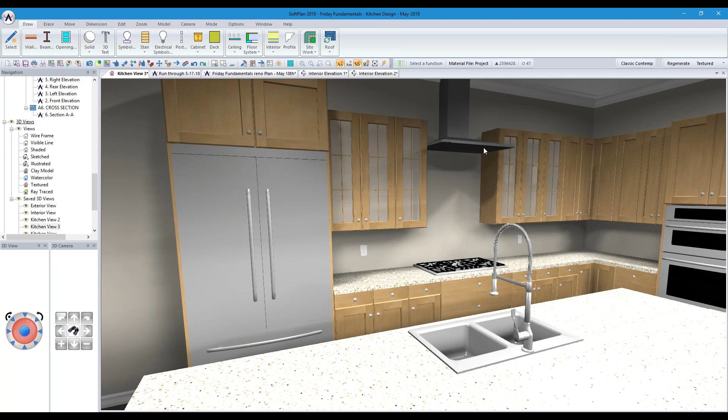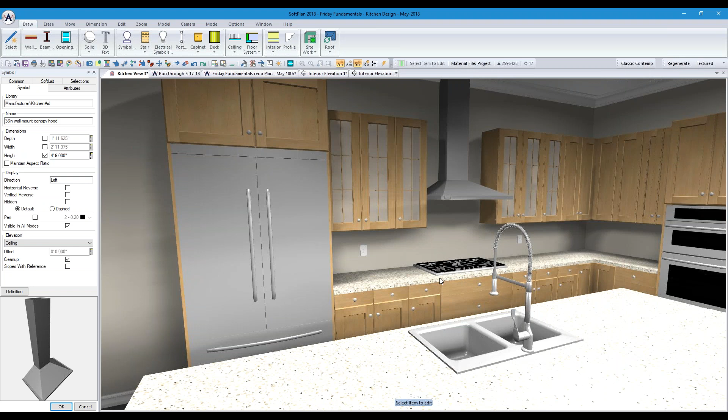Now it can be edited. It may not look perfect, but we have a fairly high ceiling in here, as you can see, so my hood's way too high. Knowing that if I edit the symbol, I am going to distort it slightly, accepting that, you can come in here and make this like 4 foot 6 inches, which just means the angles are going to be distorted slightly coming down - it's not as flat an angle as it should be. But if you're not concerned about the exact symbol being drawn, you just want a hood there, that's fine. On a typical ceiling height, this one would fit just fine too, it would not be an issue at all.

So if we come back in here, now I'm just going to zoom out. You can see that when we draw symbols, we draw them right back to the wall, so you may want to move your cooktop a little bit farther forward. Something else we can do is go into our...

Cabinet, and I'm going to edit the cabinet, and go to the countertop, and we can add a nosing to the countertops. You can put beveled edges on them, either just on the front, or on all the edges. So on all edges for something like an island would be ideal.

We can also go into our accessories and do a tiled backsplash in behind it. So I could go to, say, stone tile 2. I can make the height, say, 3 foot 6 inches, something like that, so it's going to take it up to the hood. It's going to go in behind our cabinets as well, but it gives you an idea.

There's another way of doing this - if you go into your interiors, you can also draw in a new material on your wall there, much like we would do with paint or a tile in a shower, that kind of thing. So if we go back into our 3D, you should see that we now have that tiled backsplash running up. I took it a little higher than I needed to, but it gives you the idea.

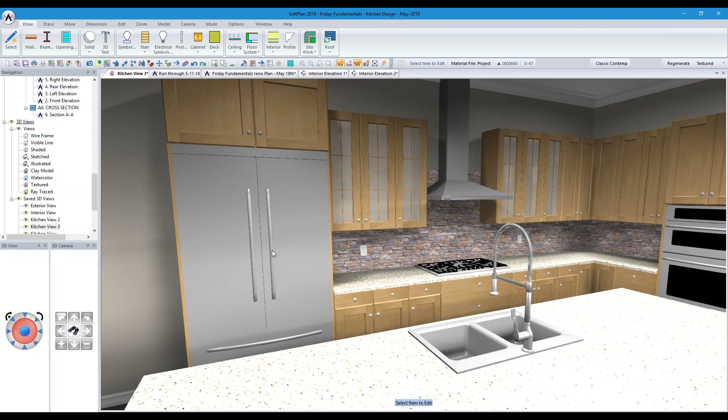Okay, so you can figure out where your hood is located and adjust it as necessary. We did pretty well with the refrigerator height. I guess my math worked there as well, which is good.

I passed. And now that we have something drawn here that looks quite finished, we're going to add in a couple lights into the drawing to enhance the appearance. I think we had some pot lights in here giving us some of the light. What you want to achieve with SoftPlan is drawing with very minimal ambient light. You want to work with the light sources, because the reality is we get light through our windows, and then we have lights in our ceilings and on our tables. We don't have just constant light around us.

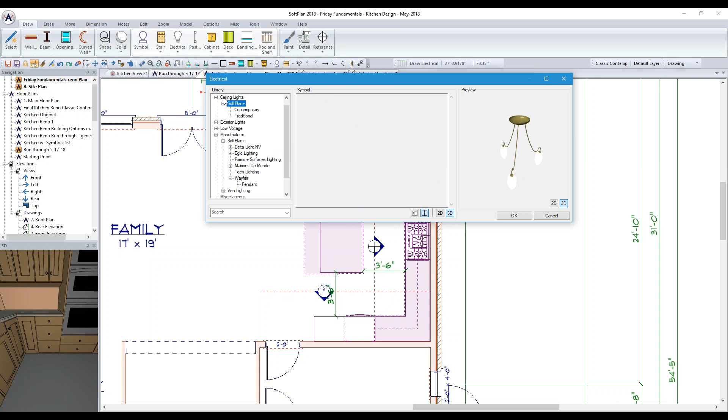So you want to work with the light sources as best you can. So if I go to electrical now, I can go to electrical symbols, and go to ceiling lights, and we can go into SoftPlan+. You can look for any number of different styles that suit you. You can go in and just search on pendant for all it matters.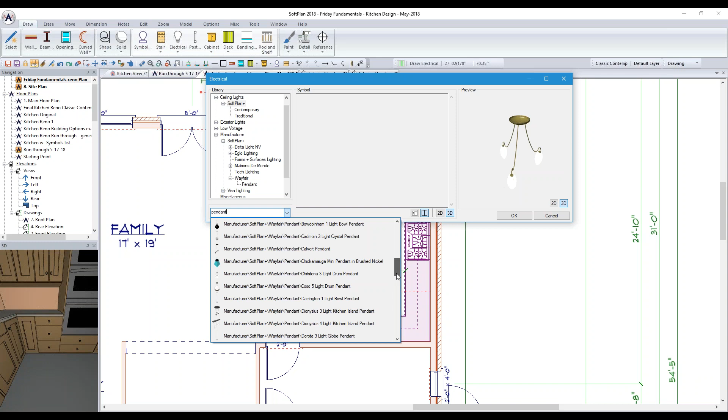If I'm not too sure, I can come in here and just look at pendants. Wayfair is one of the libraries we're currently adding quite a bit of content from, because they really are a leader right now in the interior design realm, whether it's furniture or fixtures. Wayfair has just about everything you want. And if you just go to Google 3D Warehouse, which are SketchUp files, and download the SKPs, you can go through the wizard, and we could help you import some of these symbols, but that's where this stuff came from, and it's awesome. It's an awesome library of symbols.

So the one I'm going to use is Schuler. Let me see if I can find it. Should be down, I didn't go down far enough. Okay, and I'm going to drop one of them in, first of all. Now I've got my snap still on, so it gives you an idea of where you're at. And it's going to ask me if I want to turn the visibility of electrical on. Yes, I do, because right now I've just got the visibility of electrical turned off.

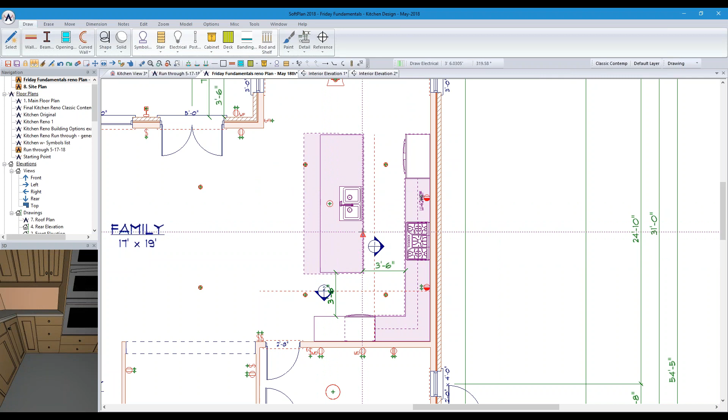So I draw one usually, and then I go to move, and I go to copy, and I drop it, and I can set the exact distance at that point, and I'm going to make it 2 of those. Okay, and it drops those ones in, and then I do the same thing in this direction, and I say 2 feet, and give me 2 of those as well, and pick OK. All right, let's take a look and see what we got.

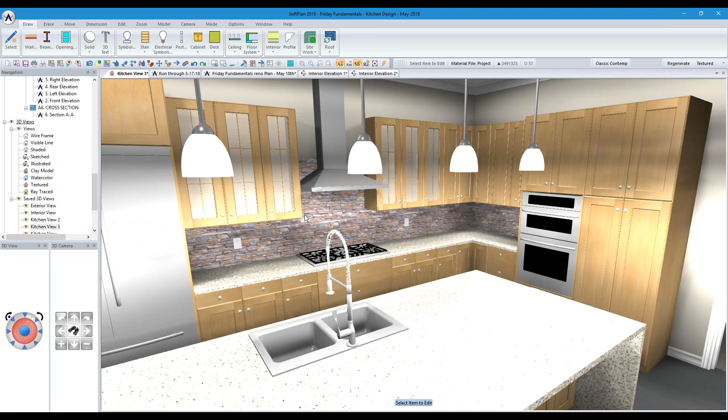So they look pretty nice. They add a lot to it. They will actually add light to the model as well. So as you can see, we're almost complete. We've got quite the design drawn in here. And the stuff's all fitting together as we'd like it to.

You can also come in and add in some interior decor to the countertops, some dishes, that sort of stuff. You can also come into your cabinets, for instance. And when you're in the wall cabinets, you can actually add shelving right into them. If they're glass cabinets, you can have it show the number of shelves in there as you'd like them to. And then you can actually draw stuff. It'll initially draw on the countertop, and then you just move it up until it sits on the shelves.

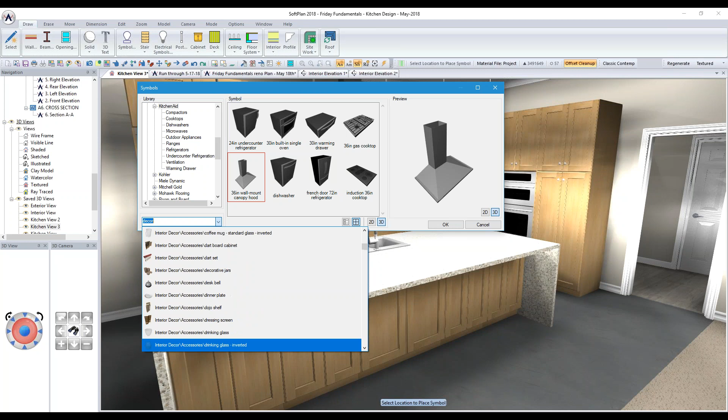Unless you actually know the exact offset, that's the best method. That's what I generally do, is I just draw them, let them sit underneath the counter, and then move them up into place. All right. But there's a full list of options when you're drawing in your interiors. You can come in here and go to decor, and you're going to find all kinds of different things that will help you complete your interior as you like. So I think a lot of the dishware you'll find right here. So I can come in here and drop a coffee mug on the countertop. Now you're going to say that it's a little bright right now.

So what you'll find is that when we drew these lights in, they might be a little bit on the bright side. I'm just going to turn my snap off there, it's the F11 key, easy to turn off. I'm going to come in here and edit this symbol.

Now the light sources are embedded right in the symbols themselves. So if you come into a symbol that has a little light symbol on it, a little yellow guy, you can come in here and go to custom, and you can drop the intensity of these down quite a bit. You can increase the decay. You can even change the color to a more warm color if you prefer. So you can go to yellow, and then bleach it out to something like that, and I can pick OK. Then I can do a repeat edit on the remaining light sources, which will drop their intensity down and their color slightly as well.

And what we see when we come back into 3D is maybe not that noticeable, but it is somewhat noticeable. Then you can come into your mode options, and into your lighting, and you can see my ambient light is already pretty low, but you can see that I can drop it down even more by doing that.

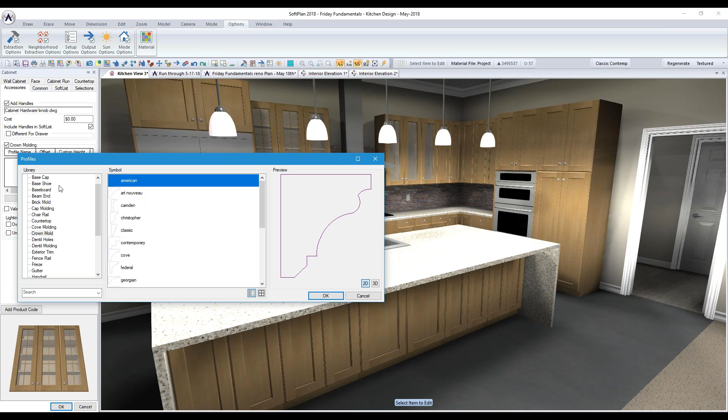The other thing I wanted to show you today is editing your upper cabinets. We're going to work on the upper cabinets first of all. Come into your accessories, and don't be afraid to go in here and turn on the crown molds. Pick OK on that. Turn on the valance and come down and choose a profile. You can put your own profiles in here as well. I just usually use this simple concave.

We also have the ability to add lighting. Here again, this is going to come up really bright originally, and then you can come in and dim it down as you need to. But just by putting that in, you can see that the model changed somewhat. I've put under cabinet lighting in, and I've put crown mold lighting in. Okay, I'm going to pick OK on that, and I'm going to do a repeat edit.

I'm going to click on this cabinet here and add the same things to it. All right, and you can start to see some life coming to the cabinets themselves. You can add crown molds to these as well.

Now, if you wanted to change the actual finishes on these - right now the crown molds and stuff came in as white - there's a surface copy paste option. So if I want them to match the rest of the cabinets, I simply click on a surface that I want to use and then click on the item that I want it to apply to. That's a really powerful tool in 3D.

And obviously I would have put the crown mold around all the other cabinets as well to finish them off, but in the interest of time, I'm just going to skip past that for today.

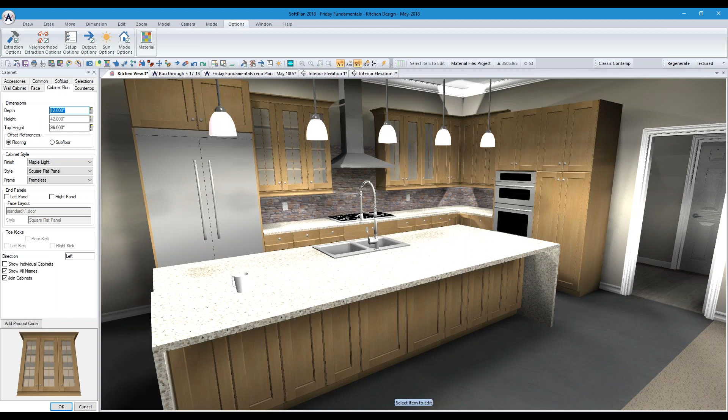You're also going to see that I can come in here and edit the cabinets themselves, and right now their cabinet style is set to maple light. I can change that to cherry dark, and that will instantly change that cabinet, and I can repeat that change to any of the other cabinets as well.

Here again, this can be done very easily in plan with a block repeat edit, that kind of thing. And there, I would obviously go over and do the ones on the other side as well.

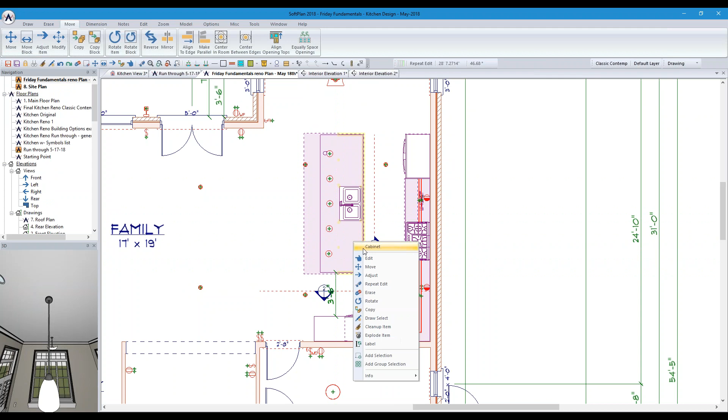The one piece I didn't do on our floor plan was add the dishwasher. It's the one appliance that's missing right now. But just like when we added the sinks, if you edit a cabinet, you can actually come in and say replace cabinet, and pick a dishwasher to fit right in that spot. The nice part is that the countertop continues over top of it and doesn't interfere with it.

All right, so I've shown you on your island how to do the waterfall ends. Don't be afraid to go in there and play with the legs and so on that are available. When you're editing cabinets, you can come in here and under accessories, you can pick on legs, put in full height legs, pick where they go, put them on the front, and you can even come in and pick from different manufacturers in here as well.

So you'll find under manufacturer, I think where the best ones would be.

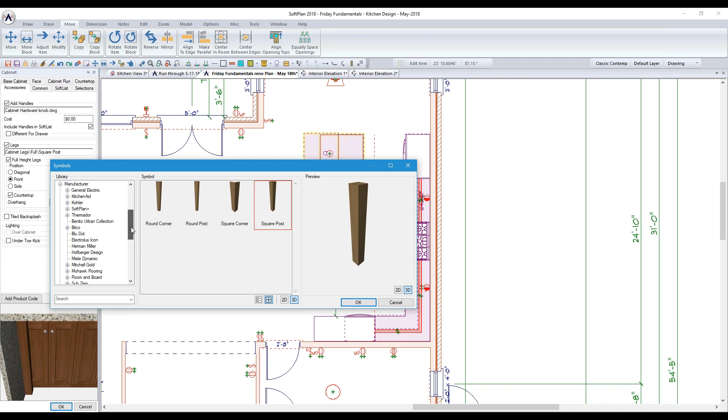Well, you can come in here. There's some different corbels and stuff like that you can put up underneath there. There's different methods you can use, but this is a quick and easy way to get them drawn in. So you can go to your corbels and brackets, there's also pilasters, so you can drop in something like this and add that to the face of the cabinet, and you'll see that in 3D as well. So it allows, you can see it right there, but if I didn't have the waterfall cabinet, I could put those in as little brackets to dress that up a little bit.

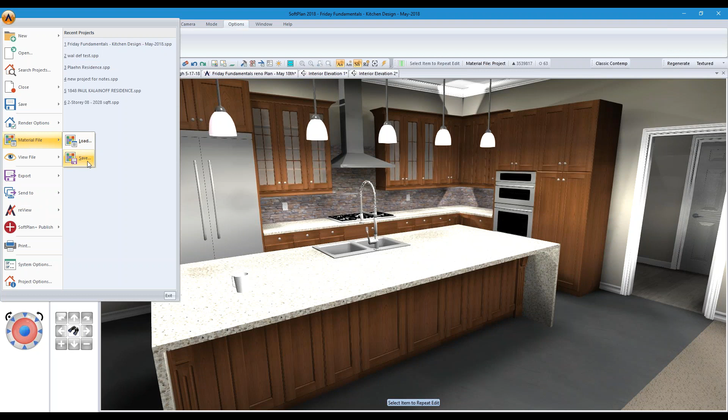The other thing we can do is come back in here and I can easily change this over to a different style. Once I get this all set up the way I want it, I simply go to File, Material File, Save, and I can call this Dark Cherry.

And that way, when I'm with the client, I can come back in and say, okay, you want to see Dark Cherry with a quartz top? Let's pull that up and see what it looks like. And if you want to see something different, you can come back in, edit this, and make it a little more modern. You can put different backsplashes in. Armstrong has some really cool pressed metal panels you can put in the background. You could really modernize this quite easily just by changing your different colors.

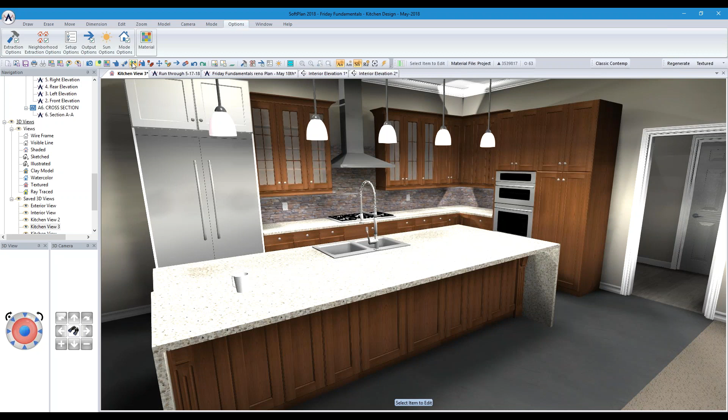I can go to painted, for instance. Using the same cabinets, I can change these over very quickly to be white. I can also go right into my material file and have it change everything globally, but sometimes it's faster just to come in and do it this way. You can see how that one little change made such a big difference. And you can come back in and edit a surface directly right on the surface, and change the colors right on those as well. So if I wanted to change those to a darker color, I can do it right there.

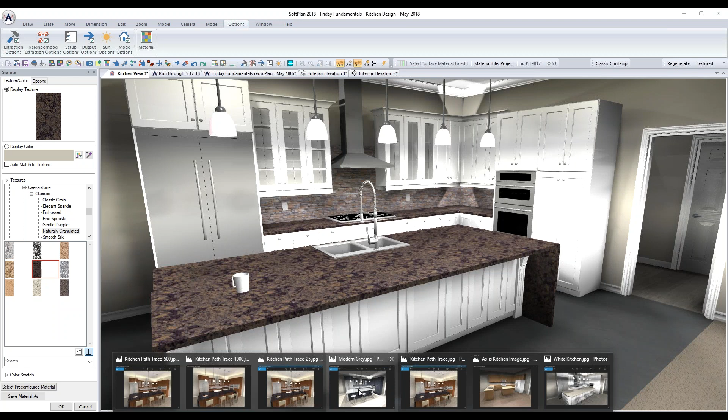And there you go. Adding a little bit of furniture in, we'll dress this up. You can go into your different manufacturers' libraries and find everything you need there to put some benches in and so on, so that in the end, you'll achieve something similar to that, or something closer to this one here. Same layout, different look.